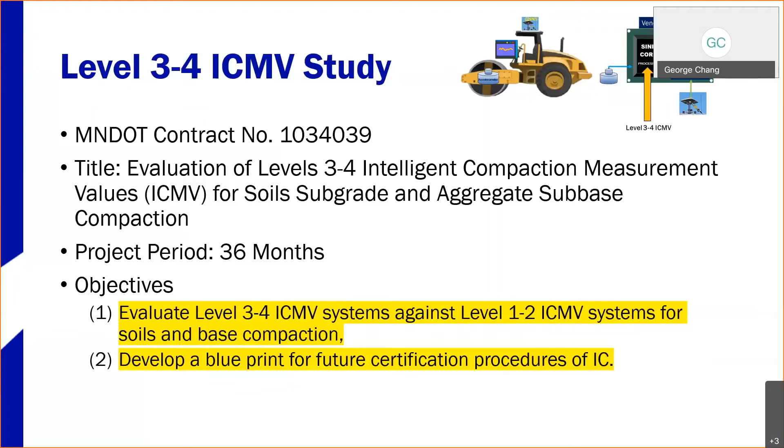So that's our overview of this project. We do have a very powerful, versatile research team that includes MnDOT - we have Lois and Rebecca as our project manager and technical liaison. We have a panel of John Sigmeyer, Jordan Nail of North Dakota DOT, and Irvin from Matthew Construction. Our research team includes me and Sohail, as well as several researchers I'm going to show you in the structure later.

Very importantly, this won't happen without our industry partners providing rollers and prototypes of level 3 and 4 ICMVs. So we thank Caterpillar for providing support, and also MOBA and XCMG for providing us the prototypes, and also Syncor for providing the module for the integration.

So this is our research team structure, started with Lois and Rebecca, and then we have me and Sohail as PI and co-PI. Then we have very experienced IC researchers, Amanda Gilliland, Sergio Abbas, and also Pramich.

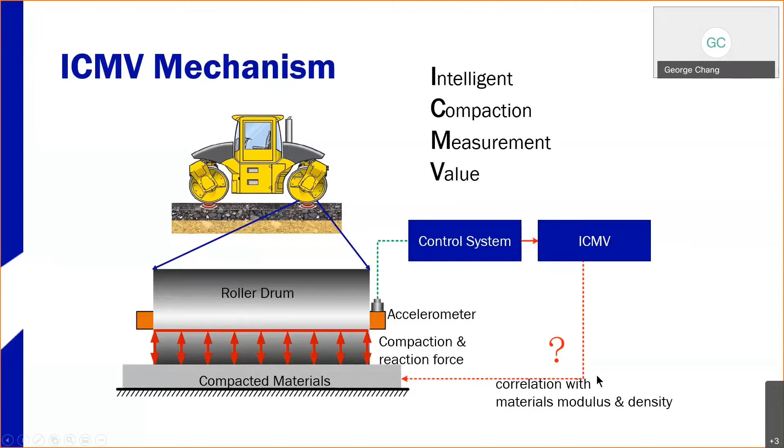So here's the inconvenient truth: to get the ICMV is a very complex process. Depending on what kind of model you use, it can be affected by top factors from the roller itself, and bottom factors from the material being compacted.

The top factors include roller vibration, eccentric forces for vibration, the amplitude and frequency for the vibration, and speed, which also affects certain ICMV of some models. That's the factor we need to keep in mind when we develop or use ICMV or interpret the value of ICMVs.

On the bottom factors, that's the soil types and moisture content. It's very important to how the ICMV is interpreted, and the mix proportioning for the asphalt, temperature of the asphalt, and very importantly, the support condition. This last factor, support condition, is very important when using level 1 or level 2 ICMV, because they are affected by the supporting layer.

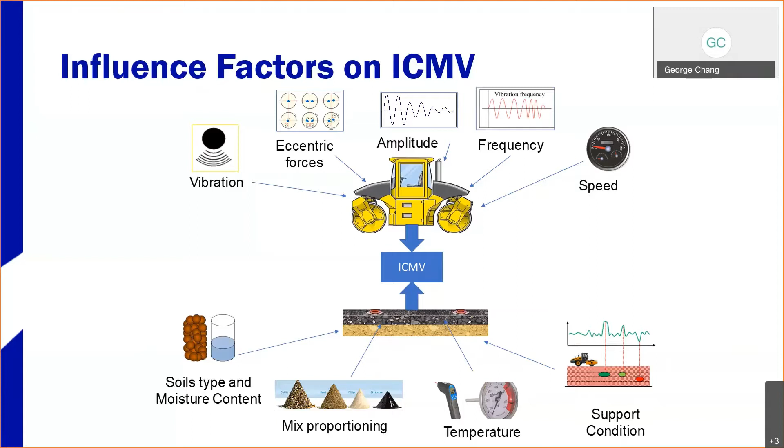There are also other challenges. To measure anything in a static mode is fine, but once you have the instrument on the vibrating roller, it has a lot of implications and complexities.

The first factor is vibration force is not equal to compaction force. That has to be recognized when any manufacturer or researcher gets into ICMV development.

Another factor is the actual strain measurement is different from the theoretical computation. So theory is not always matching the field condition. That's a very important factor to recognize. Any theoretical development by ICMV had to be validated in the field.

That's what this project is all about. Everything looks good on paper, but we'll make sure it's validated in the field.

Then there's the factor that is very important: during the later stage of compaction, the roller often gets into a double jump mode, because the compacted material gets stiffer and the reaction force makes it bounce in the air between cycles of vibration. That's when most of the ICMV models fail, and the model has to consider the bouncing of the drum.

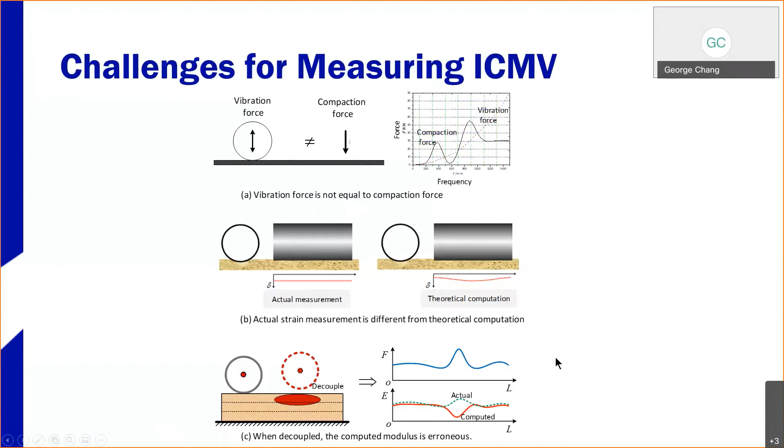That's a lot of obstacles to overcome. That's why it took years to get to what we are today. In the early days, especially in the 90s, when agencies started using ICMV - at that time it was level 1 ICMV - they started running into issues of correlation with the spot test. The correlation is very poor due to a lot of different factors we're going to talk about.

Over the years, there have been all kinds of different types of ICMV, and that really caused some confusion for the users - not only users, but also agencies, industry, contractors - about what ICMV is all about and what differences they have. So in 2017, Federal Highway published the ICMV roadmap that systematically defined the different types of ICMV from level 1, 2, 3, 4, and 5 with very stringent criteria.

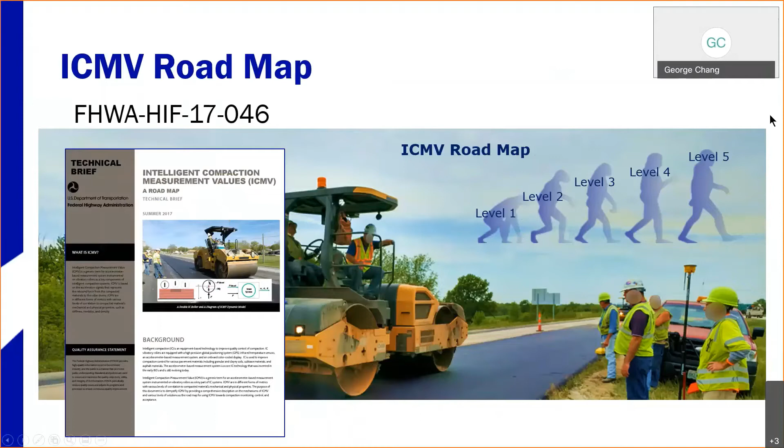So here's the thing: the level 1 or 2 ICMV uses empirical solutions based on frequency ratios, and level 2 uses the energy method on rolling resistance. Those, as I'll show you shortly, have some limitations.

Level 3 ICMV is a great advancement, I think in the early to mid 2000s, when they started using mechanistic solutions on static or dynamic methods. The outcome of the ICMV is in stiffness, reaction force, or modulus - much more comprehensive and easier for the user to correlate to the spot test.

Then level 4 and level 5 ICMV are just another level up. Level 4 can really produce a reliable ICMV even in double jumps, and level 5 ICMV is the holy grail that can produce anything you want in density or modulus. That's the kind of roadmap that the Federal Highway ICMV has laid out.

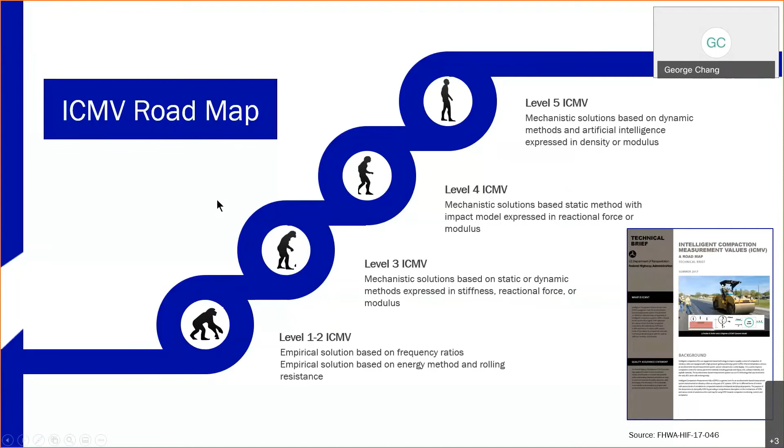So here's a very important criteria here. There are 4 criteria to classify an ICMV. Firstly, it's the correlation between the ICMV and in situ spot test.

We're not going to get away with spot tests any soon. The spot tests for acceptance are all deep embedded in the acceptance specification of compaction for agencies from all around the world. So the correlation is very important to build up the confidence between the two values, ICMV and spot test.

And the acceptance criteria is R equal to 0.7. It's been a criteria for most of the specifications around the world, including those in the EU. There's an EU standard, and most European countries have been using similar standards, and also the Chinese railway space compaction standard. So in terms of R squared, R squared is 0.5, so R equal to 0.7. That's the minimum requirement.

Then the second criteria is whether the ICMV can provide reliable values when it double jumps. Third is another holy grail for ICMVs: whether it can produce a layer-specific ICMV value, so you can separate the top from the bottom layer. That's one of the contributions from the Sohail's and NCHRP project, and other vendors have gotten into that area too. And finally, advanced IC - the ICMV alone cannot solve the world's problems, so you have to combine it with advanced technology such as AI and auto feedback systems.

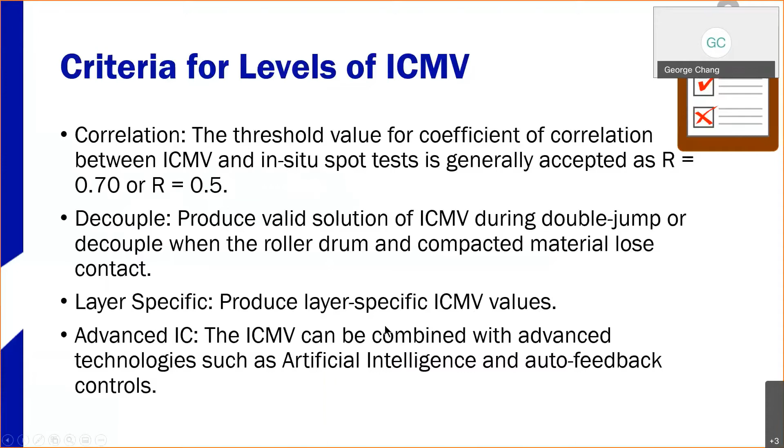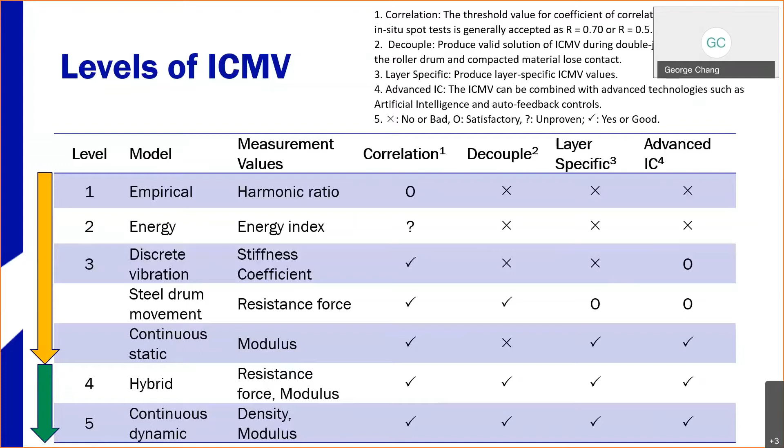So very importantly, the real boundary is level 3 here, because level 3 uses different kinds of models and produces stiffness, coefficient, resistance force, and modulus. Those are very important advancements of ICMV, I would say. Then we can get to the next level, which relates measurement more closely to the mechanical property of the material. That's a very important direction we're seeing here.

So let's go back all the way to 44 years ago. This is the first generation of ICMV, which uses an empirical reactive model, using the acceleration measured from the accelerometer mounted on the axle of the drum. Once you do the frequency analysis, you can observe different peaks at different frequencies related to the stiffness of the material. That was quite an inventive, groundbreaking finding at that time, because you can now measure the property during compaction instead of waiting until everything's finished. This is a very, very important find.

And you can see the peak is different at different frequencies. So different ICMV values such as CMV, compaction meter value, HMV, hamm meter value, and CCV, compaction control value - all of these use a similar approach using the frequency responses.

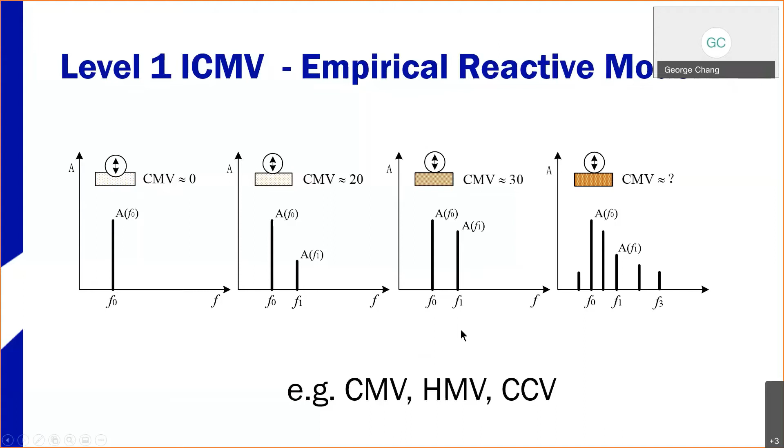And level 2 ICMV uses an energy model for the friction, for the rolling resistance. One such model is MDP, the machine drive power. This method, unlike others, is not based on an accelerometer-based measurement system.

Now come to level 3, which is a big advancement in the early 2000s. This specific model uses a discrete model, going back to the fundamental mechanistic model with the dashpot and the spring, the mass, the drum and the frame. Using that, you back-calculate the property of the compacting material. Examples of level 3 ICMV are the KB value, so-called soil stiffness value, Evib value, a vibration modulus, and SineCore's level 3 solutions.

Now we get into level 4. Level 4 is another breakthrough, because the model of the previous solutions would be invalid when it's in double jump. This model is called the collision impact model, which takes care of that. That's a very important model that can back-calculate, based on the acceleration, speed, and displacement, to evaluate the stiffness of the material during double jumps as well as non-double jumps.

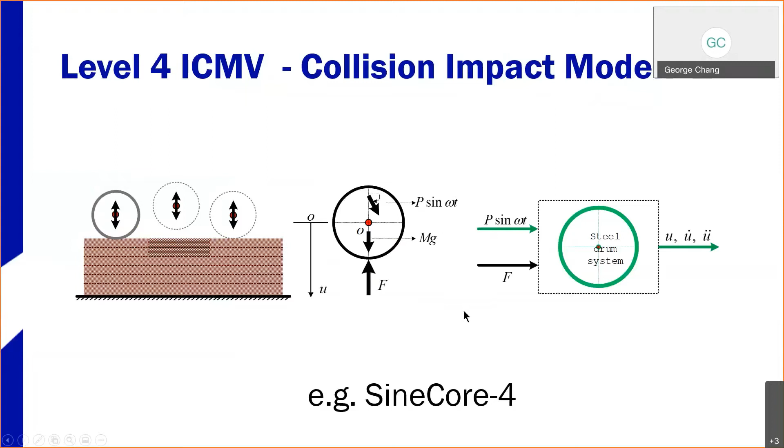Our ultimate goal is to use the level 4 ICMV combined with AI solutions. The AI is really meant to train a system from a large database - different materials, different gradations, different support conditions, different moisture content, you name it. That will help fine-tune the theoretical model and make it better.

The NCHRP 24-45 is a kind of initial attempt for that. Using this kind of system has a great impact, meaning you can build everything from the ground up, and you can have the mechanical property for each individual layer.

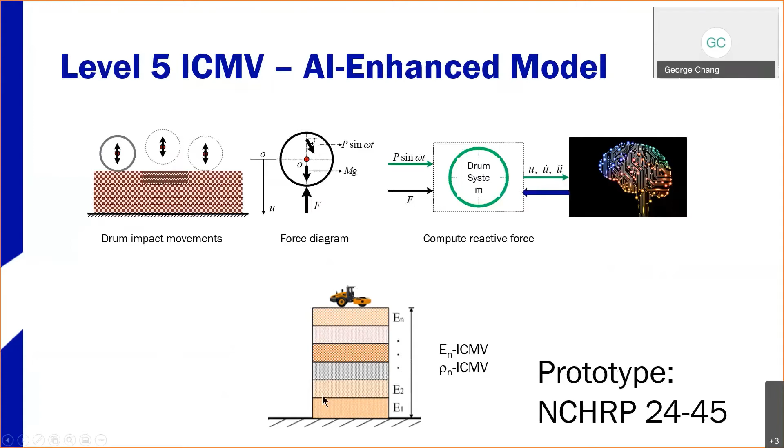In the 90s, when Chinese using the level 1 ICMV, they were firstly excited but have a very low correlation spot test with the level 1 ICMV. That really formed a big hurdle until the level 3 and 4 ICMV come up.

And in 2012, when MnDOT started some soil IC specification, they also ran into the same problem because most the ICMV at that time is all level 1 or level 2 ICMV. So it's really important for us to have an independent evaluation and push and validate the level 3 and 4 ICMV and push the higher level.

So in this study, we'll be using a Caterpillar single drum roller with the level 1 ICMV, CMV, and maybe level 2 MDP as a comparison, and it'll be mounted on those rollers with other ICMVs.

Another roller we're going to use would be the XCMG single drum roller with a level 3 and 4 ICMV prototype. That's why the gray fine line between 3 and 4 is there, because the roller information can be all provided to the level 3 and 4 module in the OEM system, so it can break the barrier to level 4. So that's what we call it 3 and 4.

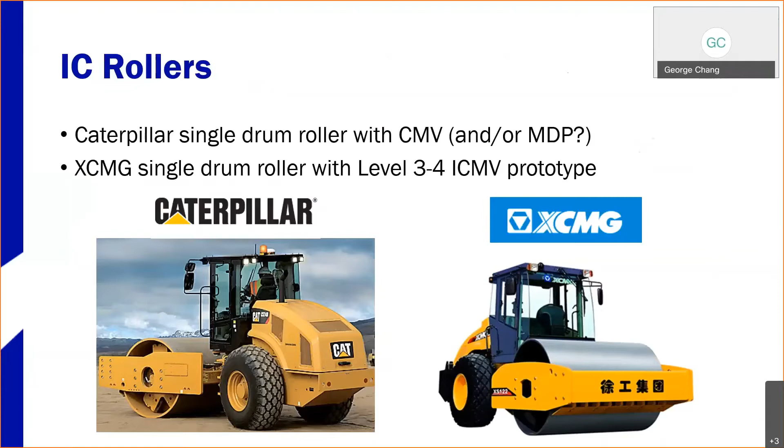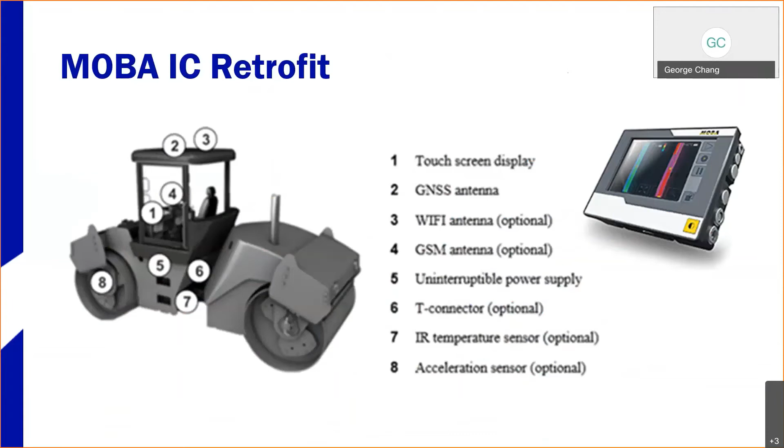Another one that we will be working with is the MOBA IC retrofit system. So it's an aftermarket retrofit system that will be integrated with the level 3 ICMV module. So the prototype dimension would be the MOBA IC retrofit system with a SineCore ICMV module.

And we're also going to be using the OEM IC system from XCMG that will be prototype integrated with the SineCore ICMV.

And then very importantly, UTEP from Sohail's team will provide us a DAQ system from the NCHRP 24-45 study that has been calibrated with numerous field studies, and they have a 3D LS-DYNA model that built out a lot of database to train the AI. Sohail is going to talk about some detail later.

So I think we have everything here to do a mini rodeo, to get into more detail about what the level 3 and 4 ICMV module is. So this is the module that I'm talking about.

They're using an accelerometer and have a circuit board built into the module to calculate ICMV in real time. Software computation is too slow, so you have to use the hardware to do that.

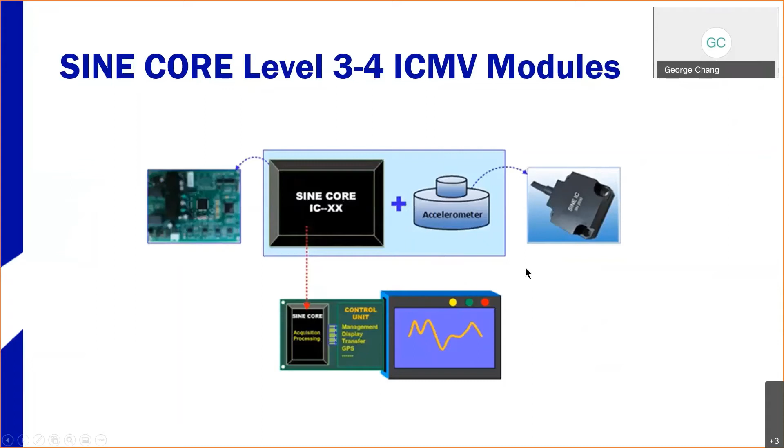So here's the current ICMV module. You can see here the module on the left and the connector on the right. This has been redesigned with the high-speed triaxial accelerometer. I think due to the COVID-19 delay, it's a blessing in disguise, giving us the opportunity to work with our research partner to improve those accelerometers and the entire system.

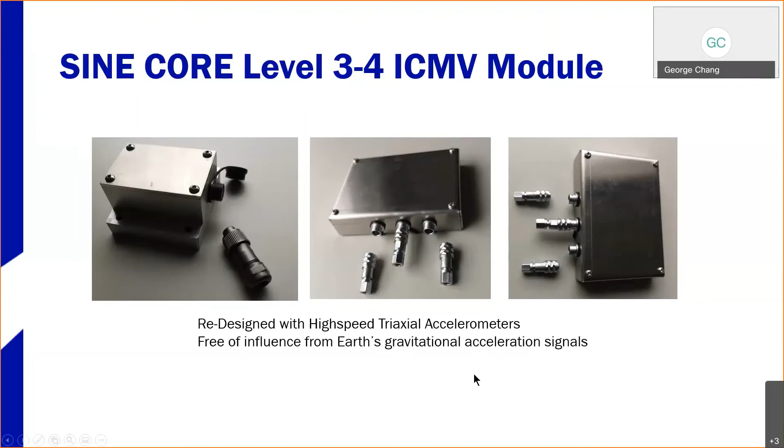So the accelerometers are free of influence from Earth's gravitational acceleration signal, and have about 3 to 4 times the maximum frequency of the roller vibration. And this should do a very good job supporting the level 3 and 4 module.

So what the input and output of this module will be is the roller parameters, including the dimension, the weight, eccentric weight, and also the acceleration from the accelerometer. For asphalt, you can have a temperature sensor as input.

So this Sine Core ICMV module has a built-in circuit board that can output the resistance force, or the stiffness, or modulus, or all three. So it will output those mechanical properties that we can compare with the UTEP NCHRP DAQ system.

So here's what it looks like—all these different rollers, whether OEM or retrofit, will be integrated with the Sine Core and then integrated into that system.

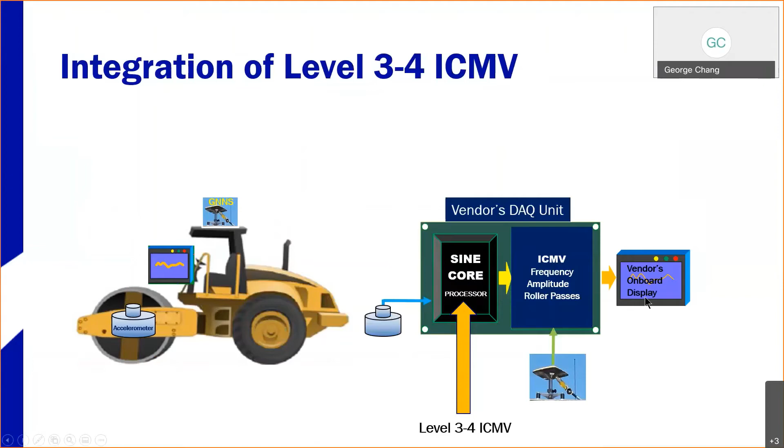All right, now we have our prototype. The next step is to make it work and evaluate it independently in the field. So off to you, Soheil.

Just let me know when to advance the slide. Yes, sir. Good morning, all. What a pleasure to be with you today.

Essentially, our role over here is to validate the measurements that we get from the different rollers that George discussed. So essentially what we are discussing is having a test site, and what we are requesting is around 25 feet, which is 2 lanes wide, so that we have enough lateral distance to maneuver, and at least 250 feet of area that we would use very carefully with the rollers to evaluate the stiffness of the system.

We start with testing the subgrade, and shortly after, the base will be placed and compacted on top of it, and we're going to remap it again so that we can do the analysis.

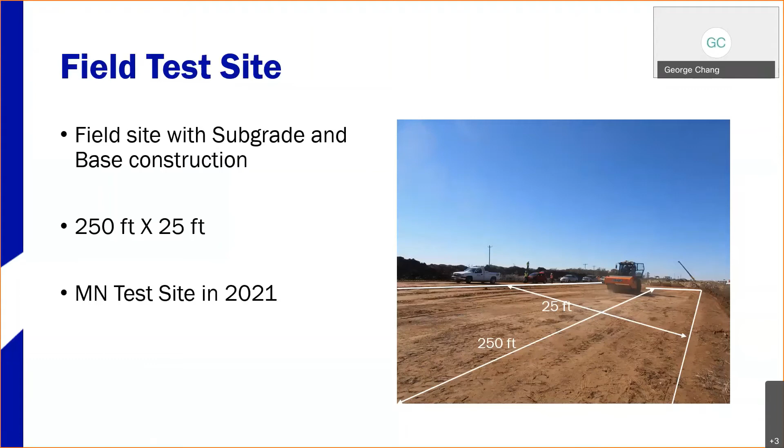So just chime in here, Soheil. So we'll be testing in the field in 2021 at least one or maybe 2 test sites in Minnesota. Go ahead, Soheil.

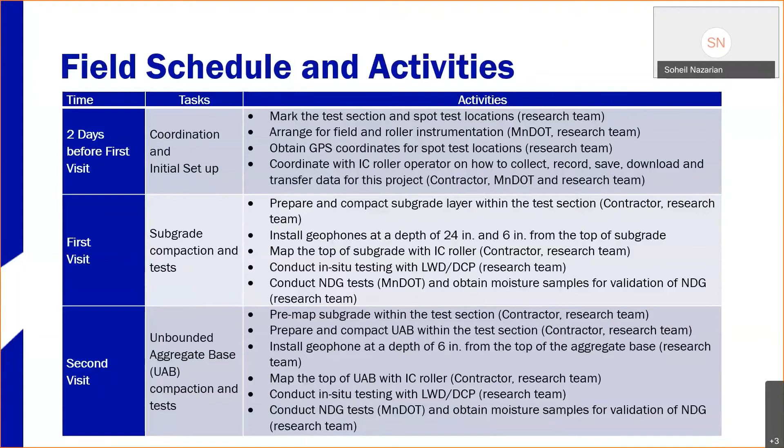There will be very high precision GPS units, one sitting next to where the geophones are, and the other on top of the roller. These are independent from us. The reason for two GPS units is to use the timing to coordinate and know exactly where the roller is relative to the geophones so we can map it.

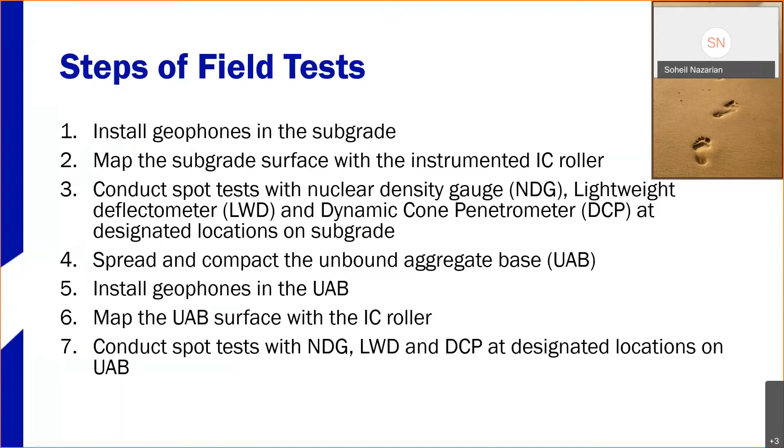So essentially, the steps in the field are: after the subgrade is prepared, we install the geophones and map the subgrade surface with the instrumented IC roller. We conduct extensive modulus testing and moisture testing. After that, we spread and compact the unbound aggregate base, install geophones in the base, map the surface, and repeat all the testing. Then we proceed with all the data to both statistically and numerically calibrate the results.

You have to be careful when doing intelligent compaction. You have spatially rich data, but in terms of depth, you only have one piece of information, so you have to be careful what you're trying to extract. By mapping on top of the subgrade once it's ready, we get an equivalent modulus down to a depth of embedment, the depth of influence of the roller, which is ascertained by the geophone measurements. After constructing the base, if you match the ICMVs from before and after, we can provide the properties and modulus of the top layer and an equivalent modulus for the subgrade.

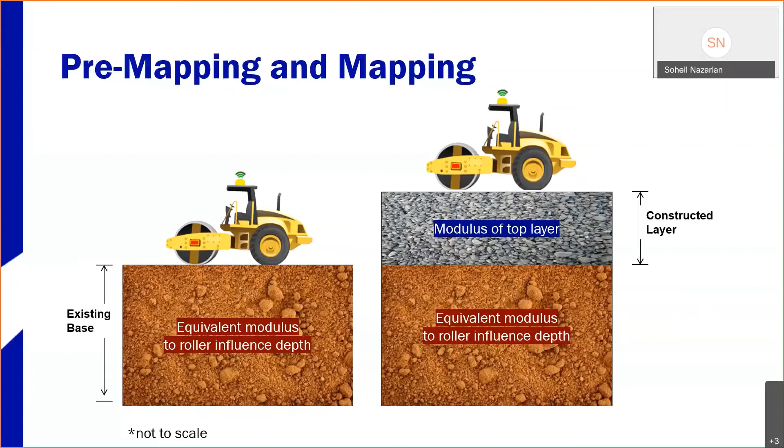That's what we did in NCHRP 2445. I encourage you to go to that report, it's out now, came out last week officially. Please study it if you're interested.

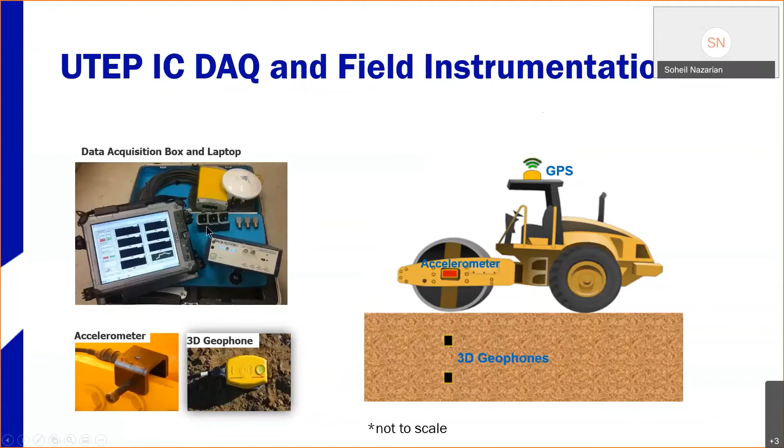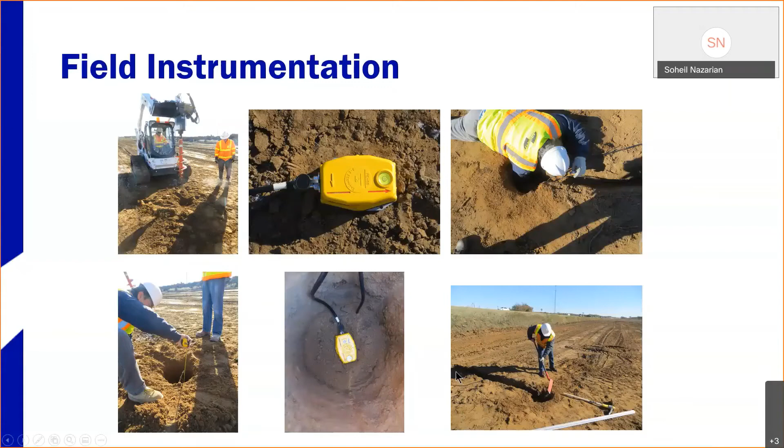The quality control, okay, so these are some of the pictures of instrumentation. We just drill a hole, take the geophone, put it inside the hole with the right orientation, bring the cables and put them in the box over there on the side so that it will be protected, and we make all the measurements. This is the field instrumentation installation. You have to be careful to put the material back as well as you can.

This basically shows you the setup. You see Sergio over here, he's the master of putting all the system together. He's our instrumentation electrical engineer, and he's sitting over here observing the location of the geophones while there's a GPS next to him, and there's a GPS on top of the roller. We are just mounting the accelerometer that comes with most of the existing systems, and our accelerometer is mounted on the roller as well. You see two of them over here. We usually have one on this side, the other one on the other side to consider the uneven movement of the roller.

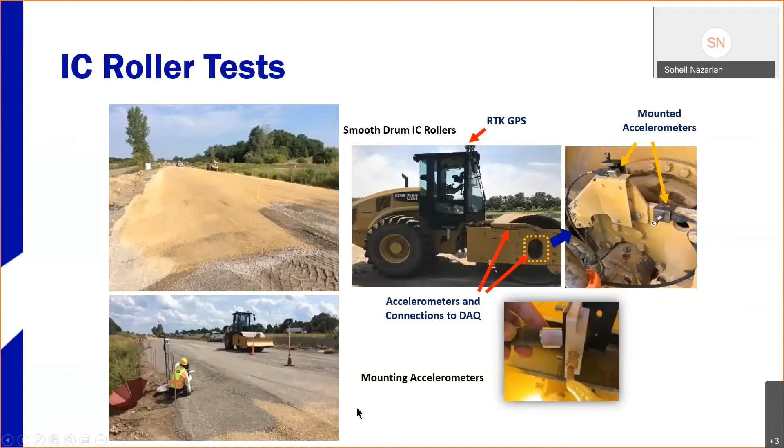The calibration of the model is very well documented in the work that we did with one of my colleagues, Mehran Mazari. That has to do with the discrepancies between the field and the laboratory, because the compaction in the field is different. But it's been shown many, many times that it's systematic, so we can basically come up with a calibration. After we calibrate the system and got the model calibration, we go to the next step.

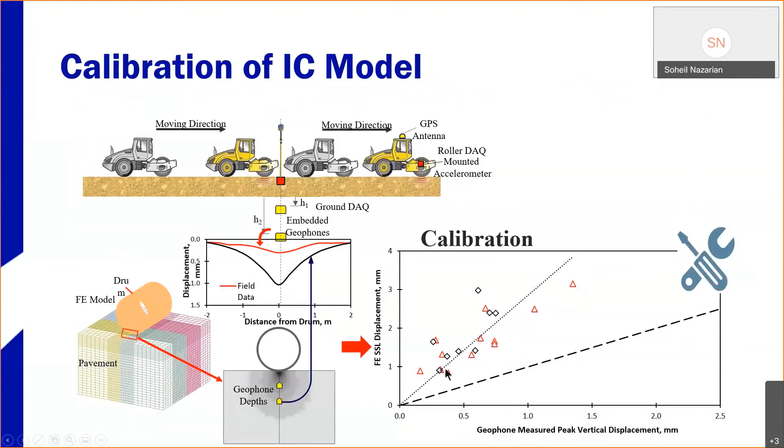Show the next slide, please. Just one back. We go ahead, and I told you we run more than 30 tests on a grid over here at the site, so that with the LWD and DCP, and knowing the moisture, we go ahead and do a calibration of the model, local calibration of the model to the soil, which would be the next step.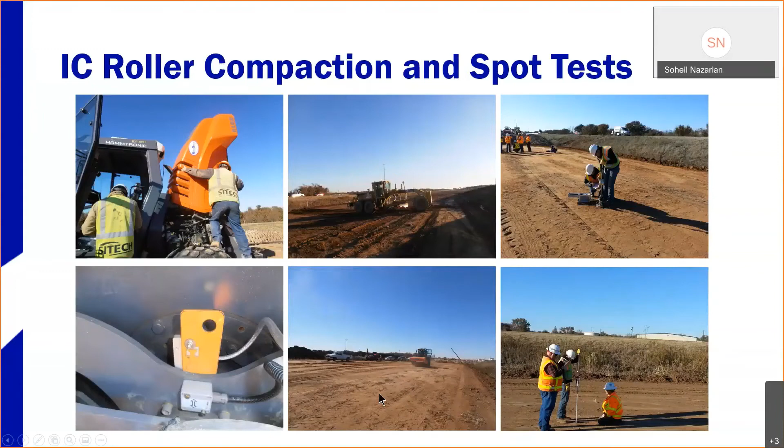So basically this case shows you the calibration of the model with the local calibration using 4 or 5 points with different LWD moduli. We come up with a local calibration, and then for all the data at the site, we start predicting the modulus using the ANN, and that shows you that within 10, 15, 20 percent, we can estimate what the modulus of the layer would be, based on about 6 or 7 sites that we did as part of 24-45.

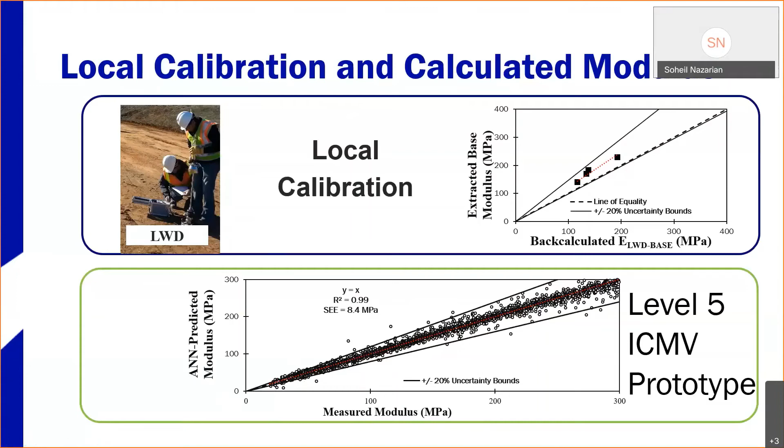The next one, please. You want to go over that, or you want me to go? George, you want me to go or you're going to go? So let me cover this part then.

Okay, so what Soheil just described is going to be tons of data, really high quality data. That's what we're aiming for, really learning from not just the NCHRP study but all the IC study that Soheil and I have conducted for the past decade, more than a decade. So those data will be processed using the raw data as well as the processed data, so we can do the correlation and evaluate the criteria.

In this case, probably 3 criteria that inform the ICMV roadmap from the federal highway: correlation with the spot test, whether it can produce ICMV during double drums, and whether it can provide layer-specific properties. So those are the 3 criteria that will be evaluated using statistical analysis, correlation analysis, and also compared with all level ICMVs. What I've been seeing, what we're just showing on the integrated model, those were provided level 3 and 4 ICMVs.

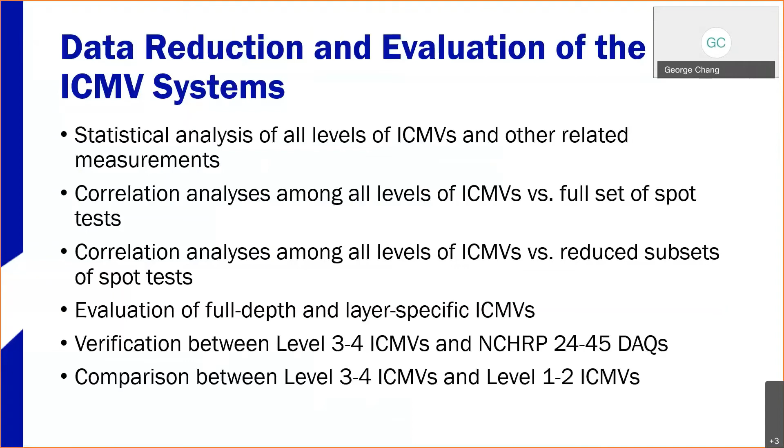So the final report will be a framework for future certification programs for single drum ICMV rollers: what the test site requirements are, the dimensions, the material, the layers. That would be outlined in this framework. The IC roller system requirements will also be in there, plus the spot test requirements. So the framework will provide really all the components that you normally need for an AASHTO standard, for example.

Based on the study, we'll be looking hard at the requirements for correlation between ICMV and spot test from the test strip for IC specification. The R equal to 0.7 criteria has been used for about two decades, so here will be another critical review of the requirements. Because the previous requirements are based on level 1 ICMVs, based on this extensive study, we may establish minimum requirements for correlation at different levels of ICMV, so agencies can pick and choose what's best suited for their IC application.

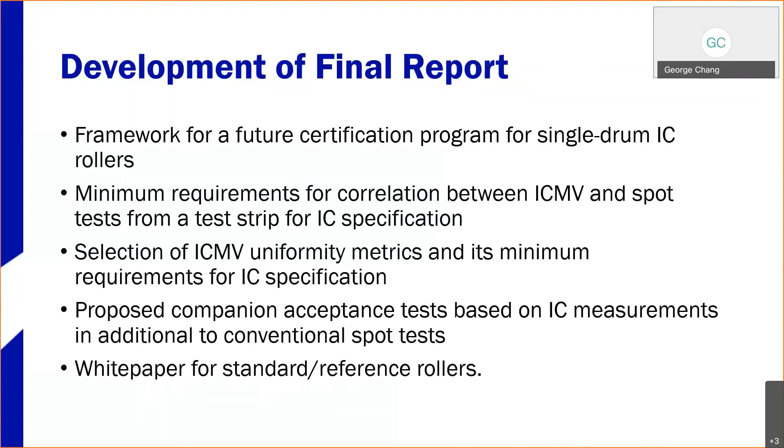Because the past research normally used level 1 or 2 ICMV, now we have everything from level 1 all the way to level 4, plus all the super duper in-field instrumentation, and also the ANN model from the NCHRP study. So I'm really excited to talk about what we're going to do in the next year or two. We're going to finish in about 18 months from now.

So the integration for task 2 should be finished right before we do our field validation. So we're probably going to finish before July 31st, 2021. As we speak now, the integration is in the final stage of integration and testing, so we should be able to finish much earlier than July 31st.

The instrumentation and field test should be completed by October next year, but considering the weather in Minnesota, we should finish by the end of summer. Then we'll start the data processing, analysis, and critical review, and finish the report by June 30th, 2022.

So if you look at where we are now, we've come a long way. It just took a long time for us to work with all the different parties, industry partner, components, redesign, and integration. So where we are now is the end of September 2020.

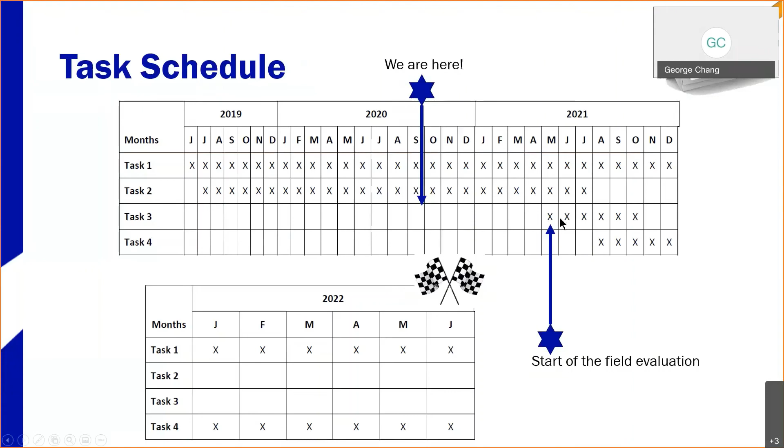So the final slide I'd like to highlight is the ICMV roadmap. You can see that big whoosh arrow here - it really comes a long way from level 1 all the way to level 2 or 3. It took about 20 years, and to level 4 another 10 years. So hopefully we can achieve level 4 and 5 in another 4 or 5 years' time.

And at the bottom is a link to the ICMV project webpage on the MnDOT website. You can check it out and check out our progress. Lauren, now we are ready to entertain any questions.

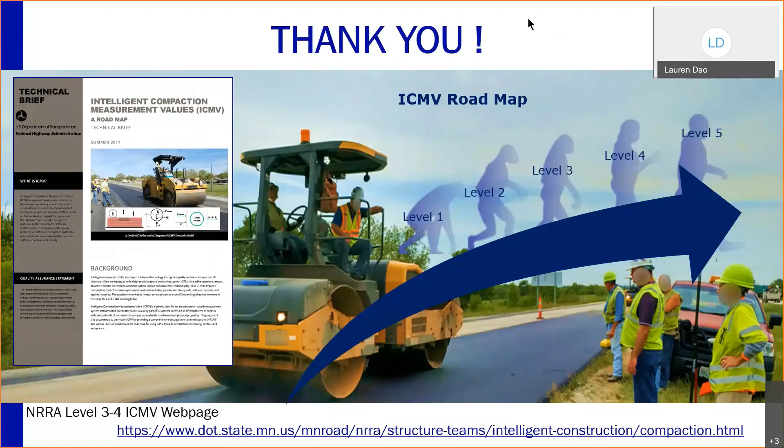Maybe Soheil, if you do have one question in the Q&A box - I haven't received any other through the chat, but you guys should be able to see that as well. Hey Lauren, your voice is very soft. We do have one question in the Q&A box, I didn't receive any through the chat. Are you able to take a look at that? I do not see a question, Lauren. Sorry, I'm in the chat but I don't see a question. Okay, it should be in the Q&A, that should be at the top, you just have to drop down. I guess I can, yeah I saw that. Okay, let me read it out so Soheil can help answer.

So the question is: Dr. David White from Ingios Geotechnics has been using the automated plate load test to accurately calibrate IC rollers for several years. Would you comment on what level 4 or 5 ICMV development would add to what Dr. White already has in use?

Soheil, go ahead. Well, Dr. White has a very nice system, and since he's a private person, his system is proprietary, and it will be difficult for DOTs to specify proprietary information. What we are doing is essentially providing an open source verification and calibration system so that the DOTs can do it on their own with any consultants or in-house force that they desire to use.